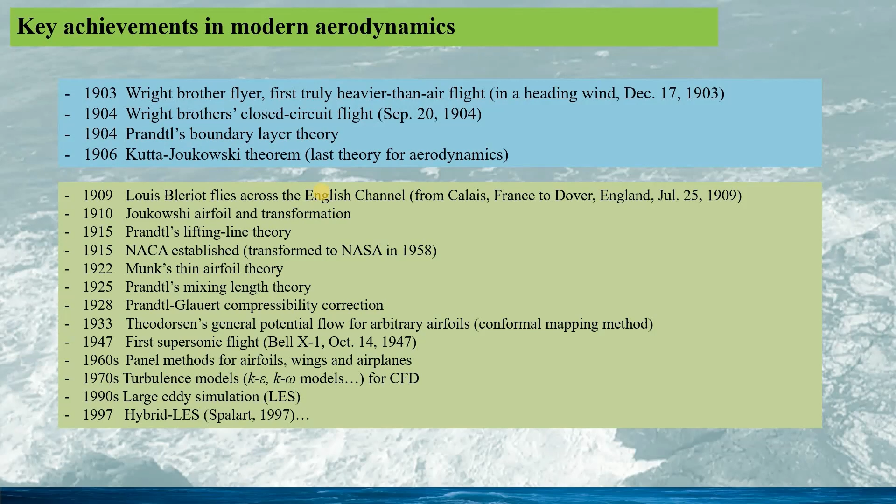In the 1990s, large eddy simulation was used for studying turbulent flow. And in 1997, hybrid LES was proposed by Spalart.

The Joukowski transformation is given by this. Here, A is the radius of the reference circle. See here the red circle. So to create a Joukowski airfoil, a modified and shifted circle, zeta prime, is calculated as this. So this would be given in this blue circle.

Here r_off is the distance between the center of the original circle, the red one, and that of the modified blue circle. So this parameter is used to control the Joukowski airfoil thickness. And delta is the shifting angle here. See the figure. This parameter is used for controlling the camber line.

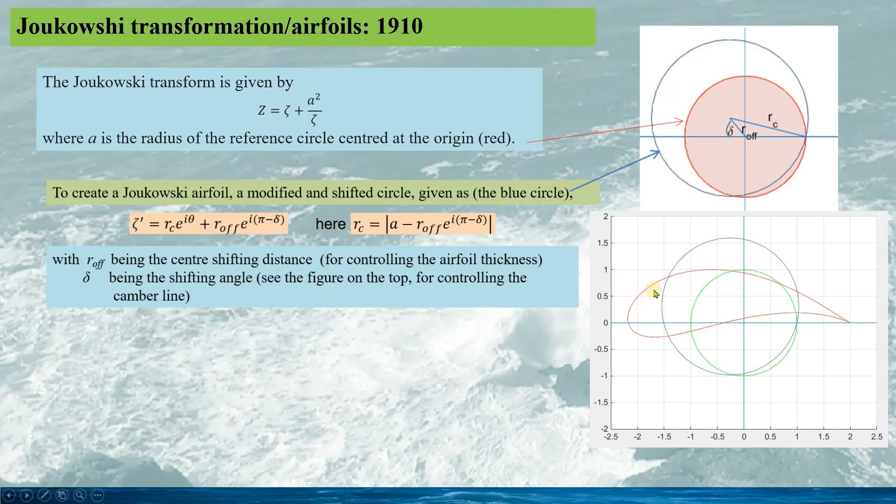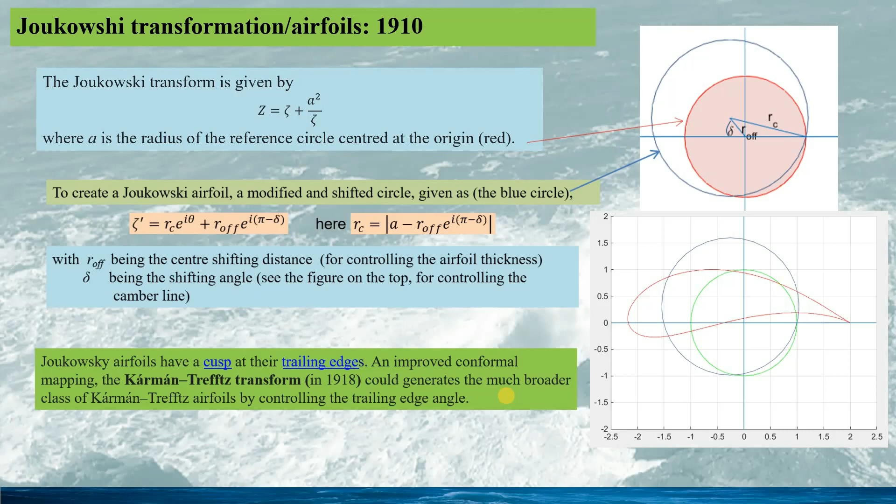This plot shows the original circle in green, the modified circle in blue, and the Joukowski airfoil in red. From this Joukowski airfoil, we can see this airfoil has a cusp at the trailing edge. This might be a limit for the Joukowski airfoil. For solving the problem, Kármán-Trefftz made the transform in 1918, which could generate much broader airfoils for practical application.

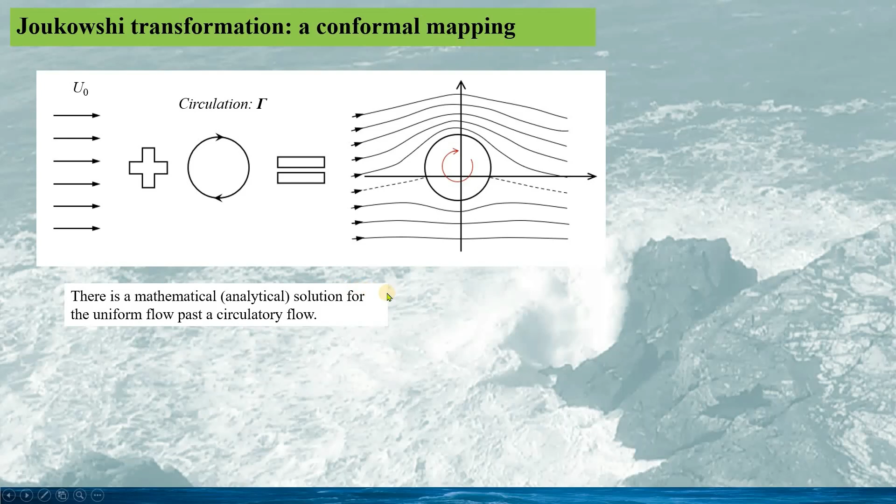So for such a type of flow, we have the analytic solution. So if we apply the Joukowski transform, also called conformal mapping, using this formula, we can have the flow past an airfoil, the Joukowski airfoil. And we can see from this plot the stagnation point at the leading edge and the stagnation point at the trailing edge. And the flow separates from the trailing edge. This is in accordance with the Kutta condition.

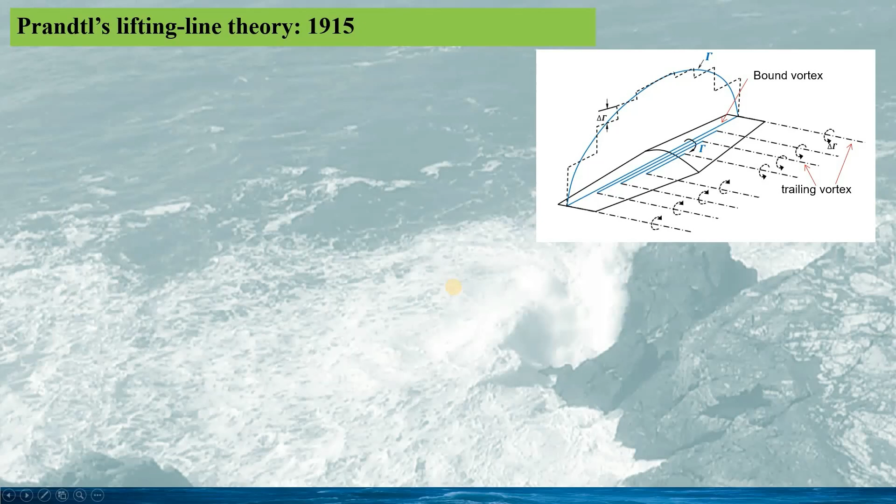The Prandtl lifting line theory, or the Lanchester-Prandtl wing theory, is a mathematical model for predicting the lift distribution of a 3D wing based on its geometry. See here. So the lifting line theory states that the lift over each wing segment, the local lift per unit span, does not correspond simply to the 2D analysis product, but is also strongly affected by the neighboring wing sections.

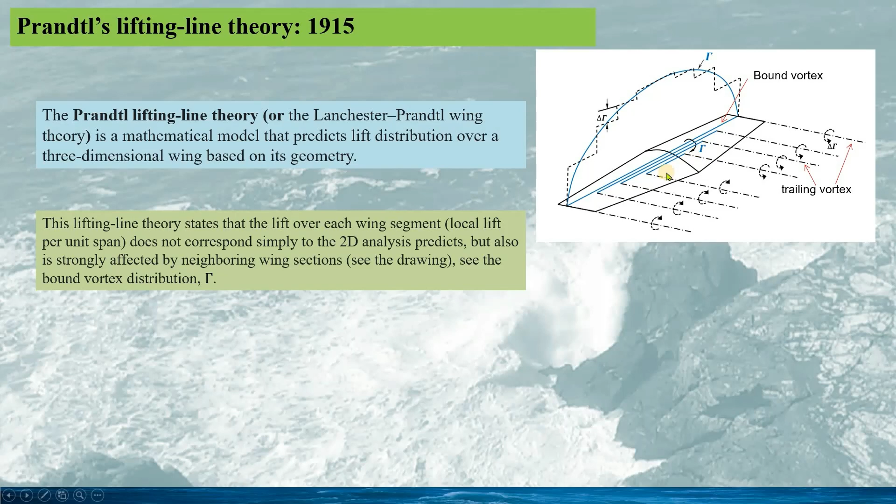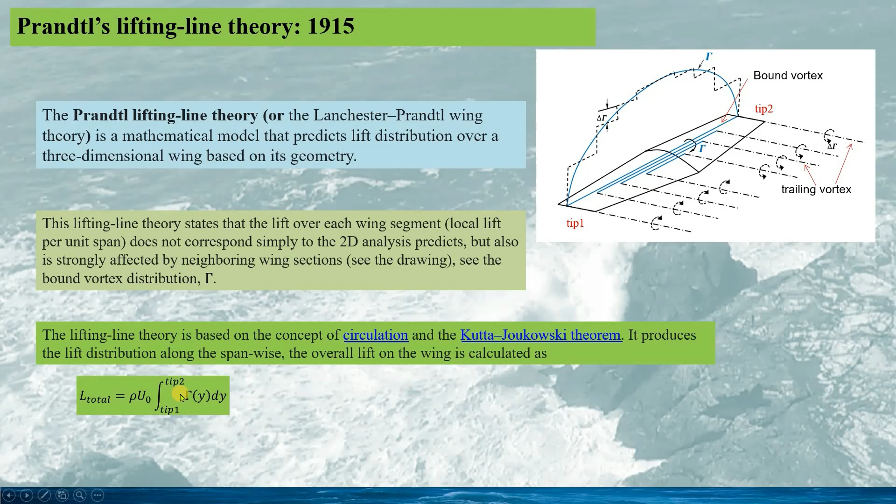So we see this bound vortex and its distribution along the span of the wing. The lifting line theory is based on the concept of circulation and the Kutta-Joukowski theorem. It produces the lift distribution spanwise based on the distribution of the bound vortex. So the overall lift on the wing is given by this integration from tip 1 to tip 2.

Thin airfoil theory is a simple theory of airfoils in incompressible inviscid flows. It was developed by Max Munk in 1922 and further refined by Prandtl, Glauert and others. The theory idealizes the flow along an airfoil as a two-dimensional flow along the thin airfoil.

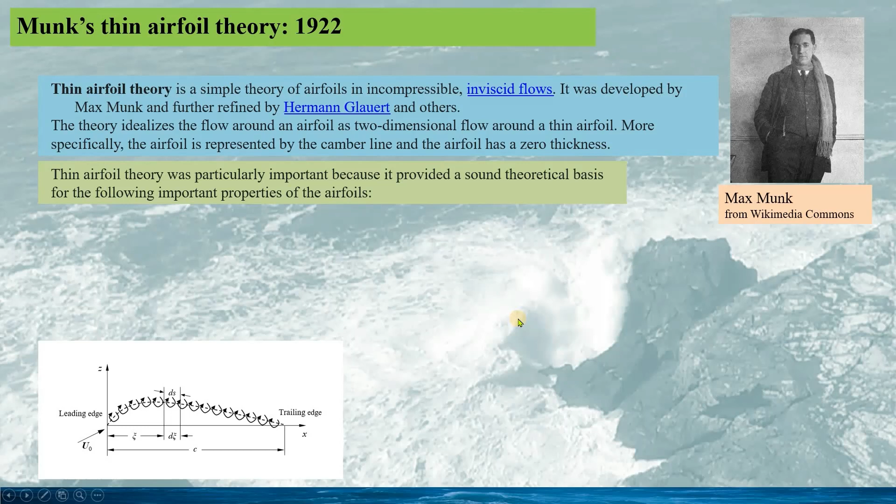The thin airfoil theory was very important because it provides the sound theoretical basis for the following properties of the airfoil. The center of pressure and the aerodynamic center are coincident and lie at the quarter chord behind the leading edge. The theoretical lift coefficient for a thin airfoil is given as this simple equation. Here, alpha is the angle of attack in radians, and CL0 would be 0 for the symmetric airfoil.

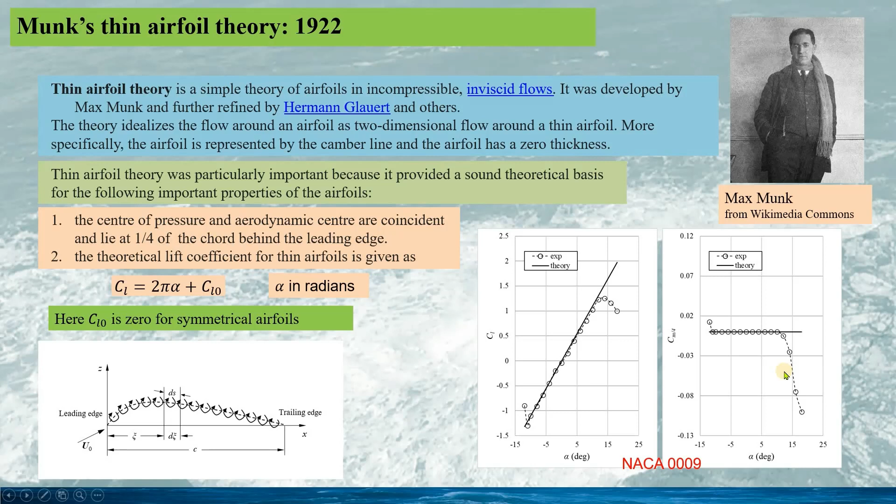Take an example of the thin airfoil NACA 0009. The prediction using the thin airfoil theory is in black line, and the dot and dashed line is from the experiment data. This is for the lift coefficient, and this is for the moment coefficient. So we can see when the angle of attack is small, say less than 12 degrees, the thin airfoil theory predicts the lift and the moment very well. See the comparison here.

In 1925, Prandtl studied the molecular shear stress in fluid. See the figure here. So he could determine the shear stress τxy in terms of the mean flow velocity Uy and the fluid turbulence viscosity νt, given in a form as this. And based on Prandtl's proposal, the mixing length theory, the fluid turbulence viscosity is given as this. And here, l_mix is the mixing length. It needs to be specified in the actual simulation.

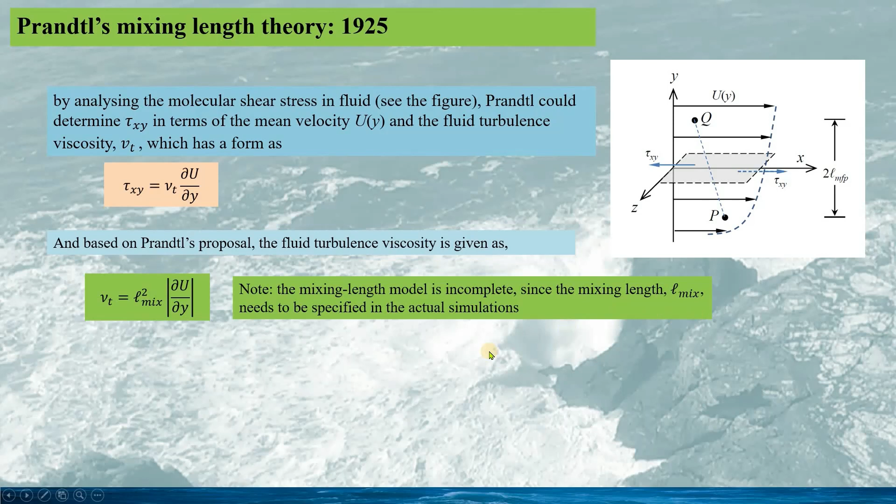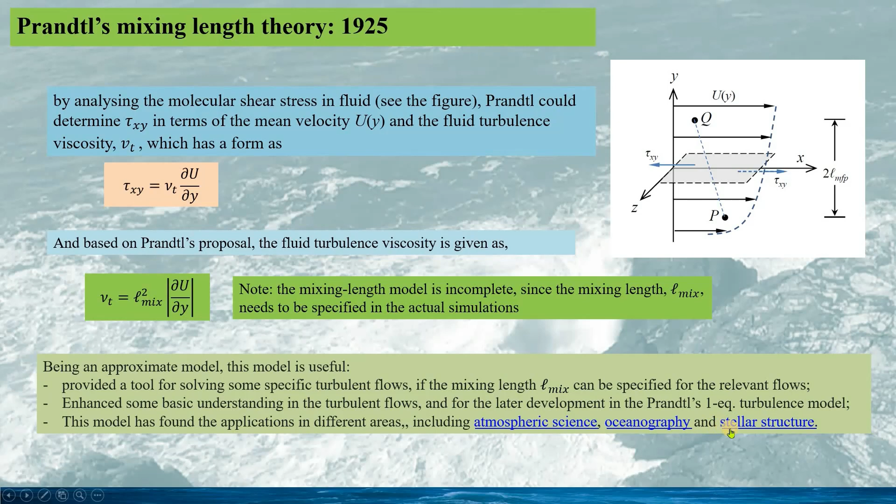So this, in a way, would limit the application of Prandtl's mixing length theory. This approximation model is still quite useful for providing a tool for solving some specific turbulent flows, if the mixing length l_mix can be specified. This model can be used for enhancing the basic understanding of turbulent flow and provided the basis for the later development of Prandtl's one-equation turbulence model. This model has found applications in different areas, including atmospheric science, oceanography, and stellar structure.

In the 1920s, researchers worked on high-speed flows. In 1925, linearized supersonic aerodynamics was developed, and in 1928, Prandtl-Glauert made the correction for compressibility, and in 1940, the application of supersonic flow theory was made, and in 1947, the faster than speed of sound flight, Bell X-1, was made.

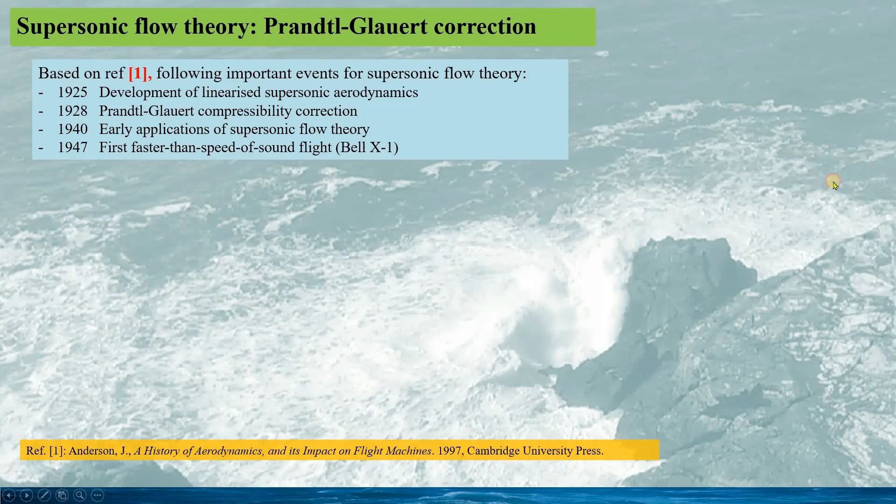In the development, an important advancement was the Prandtl-Glauert transform, or Prandtl-Glauert correction, established based on the linearized equation with compressible inviscid flow, and the correction was made for the pressure coefficient Cp given by this. Here Cp is the pressure coefficient with compressibility, Cp0 is the pressure coefficient for incompressible flow, and M0 is the free stream Mach number.

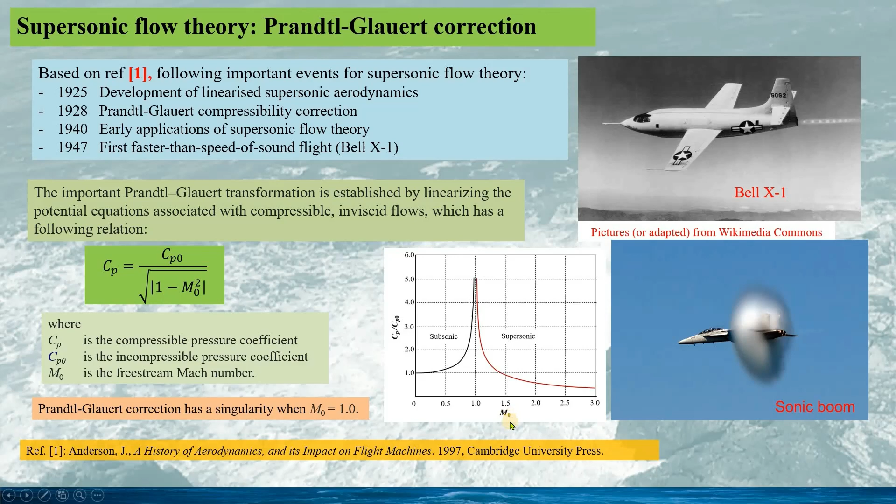Obviously, we can see the Prandtl-Glauert correction has a singularity when M0 equals 1.0. See this figure. When M0 equals 1, Cp would be infinite. If we look at this picture, we can see the sonic boom around the aeroplane when the aeroplane passes the sound barrier, that is, the Mach number is 1.0. So the sonic boom might be linked with the singularity of the pressure coefficient at Mach number M0 of 1.0.

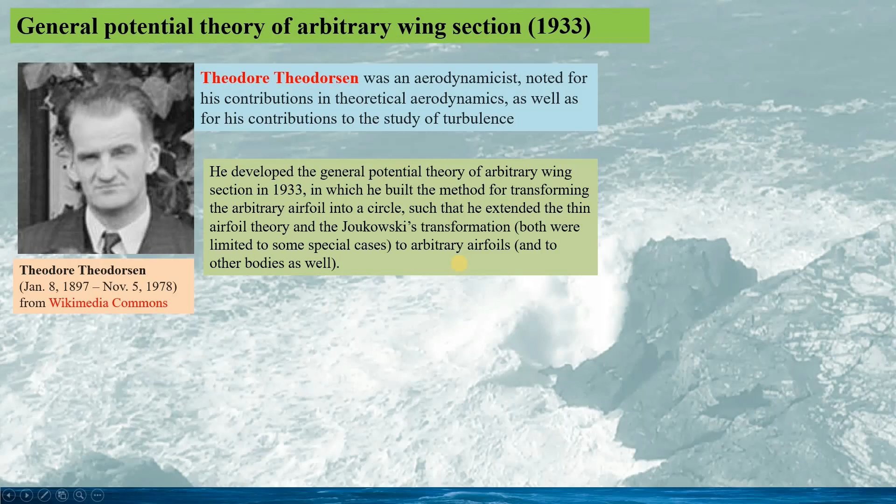Theodorsen was a Norwegian-American aerodynamicist who was famous for his contribution to theoretical aerodynamics, as well as his studies of turbulence. In 1933, he developed the general potential theory for arbitrary wing sections, in which he built the method for transforming an arbitrary airfoil into a circle, such that he could extend the thin airfoil theory and the Joukowski transform. Both were limited to specific cases, but the general potential theory can be used for any airfoil and even other bodies as well.

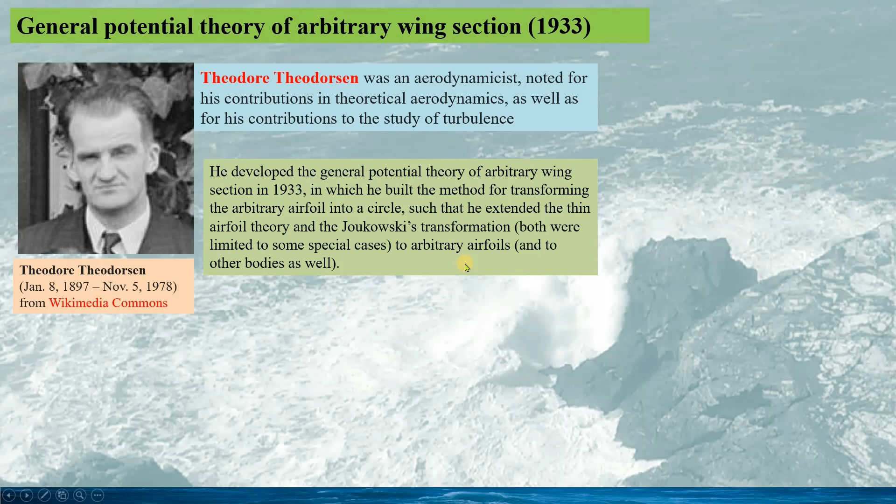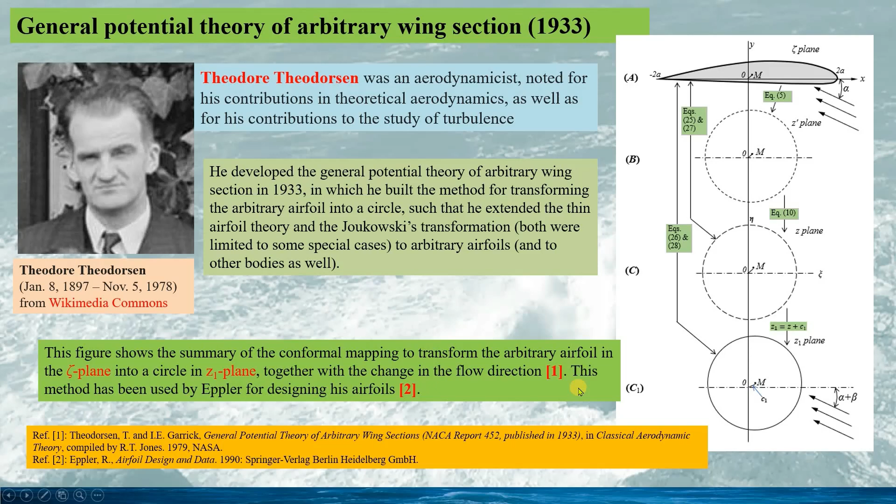With the digital computer available for computation, the panel code was developed from the early 1960s. The advanced panel codes such as PANAIR, developed by Boeing, were first introduced in the late 1970s, and such panel methods have been very popular even with the great advancement in CFD. Panel codes are still used for preliminary aerodynamic analysis because of their fast turnaround time and the reliable prediction for

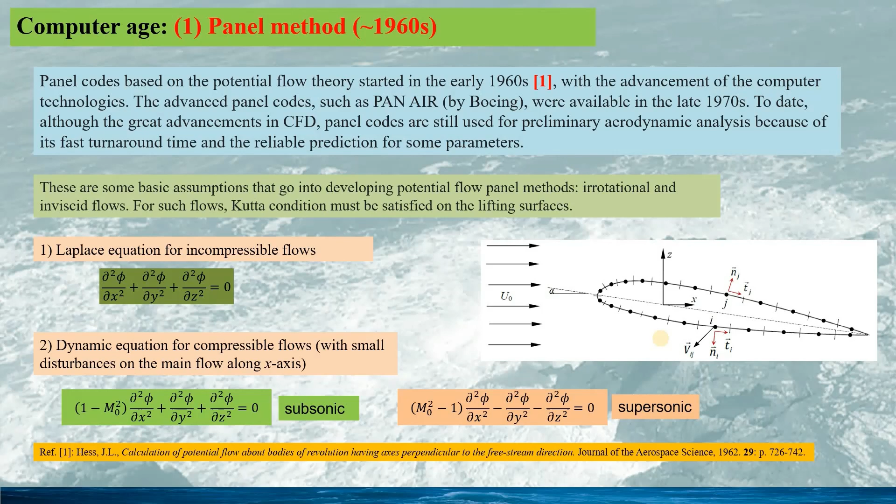the dynamic equation for the potential function phi for the subsonic flow is given as this, and for the supersonic flow, the dynamic equation for the potential flow is given as this. The compressible flow has a different dynamic equation for the potential function. Using some specific coordinate transform, we can still write the dynamic equation for the potential flow in subsonic and in supersonic to be in the form of the conventional Laplace equation. Hence, all these flows can be solved using the panel method. Details can be found in the relevant textbooks or in my talks later.

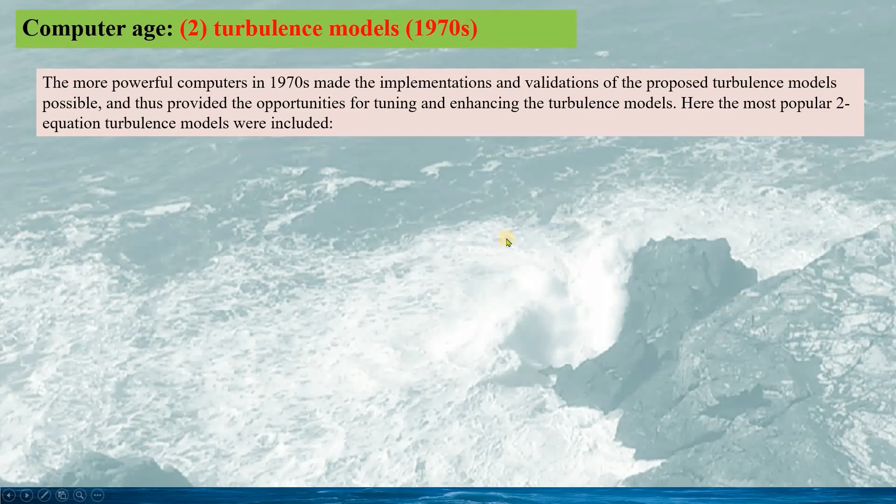Powerful computers in the 1970s made the implementations and validations of the proposed turbulence models possible, and thus provided the opportunities for tuning and enhancing the turbulence models. Therefore, in the 1970s, the turbulence models were well established and well accepted. This includes the famous two-equation turbulence models. K-epsilon model: the first K-epsilon model was formulated at Imperial College in the late 1960s and tuned and enhanced in the 1970s.

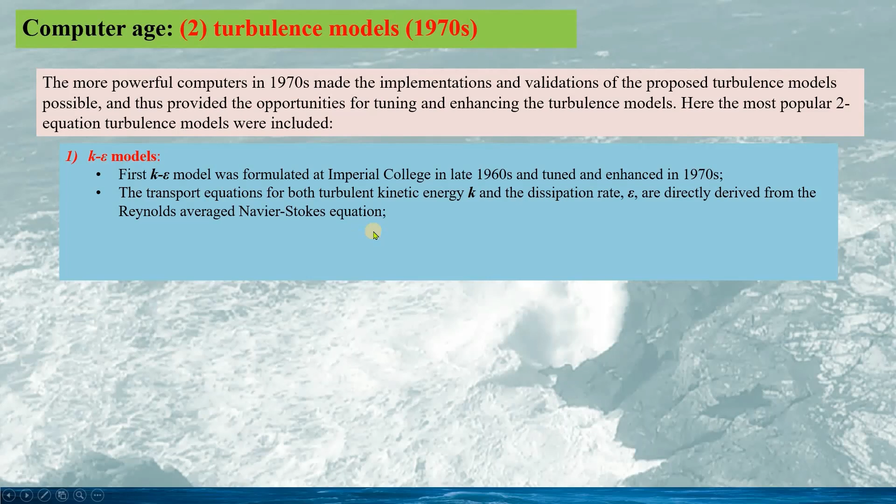The transport equations for both turbulent kinetic energy K and the dissipation rate epsilon are both directly derived from the Reynolds-averaged Navier-Stokes equations. And the K-epsilon model has gained widespread use since the 1970s. Enhanced models were available, including the renormalization group RNG and the realizable model, and many other variants. The first K-omega model was proposed by Kolmogorov in 1942 and independently by Saffman in 1970. Wilcox kept improving Saffman's K-omega model since the 1970s.

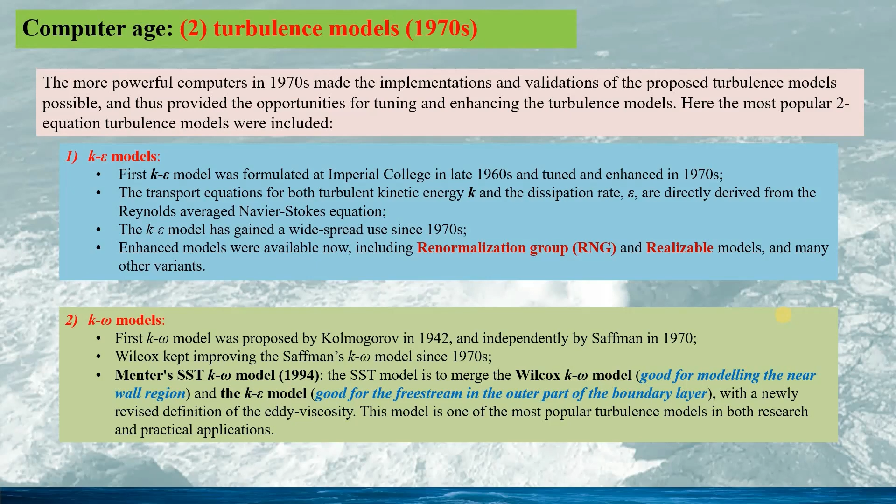The K-omega model got popular since Menter's SST K-omega model in 1994. This SST model merges the Wilcox K-omega model, which is good for modeling the near-wall region, and the K-epsilon model, which is good for the free stream in the outer part of the boundary layer. And in the SST model, the formulation for the eddy viscosity has been revised. From examples in research and in industry applications, this SST model is one of the most popular models.

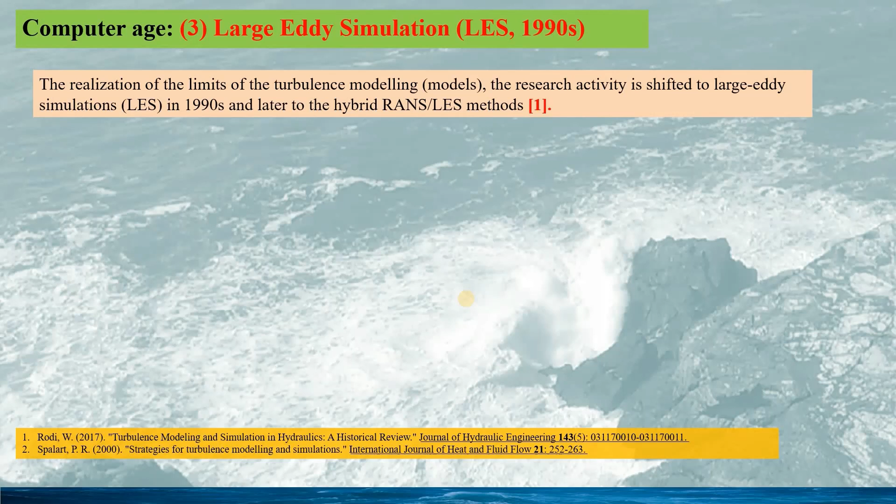Soon after the various turbulence models, the research activities in this field realized the limits of the turbulence models. Hence, a lot of research shifted to large eddy simulation (LES) in the early 1990s, and later to hybrid RANS-LES modeling, according to reference 1. It is well known in LES, large energy-carrying eddies are resolved numerically, and only the small eddies need to be modeled. Generally speaking, these small eddies are more isotropic, thus easier to model, at least in principle.

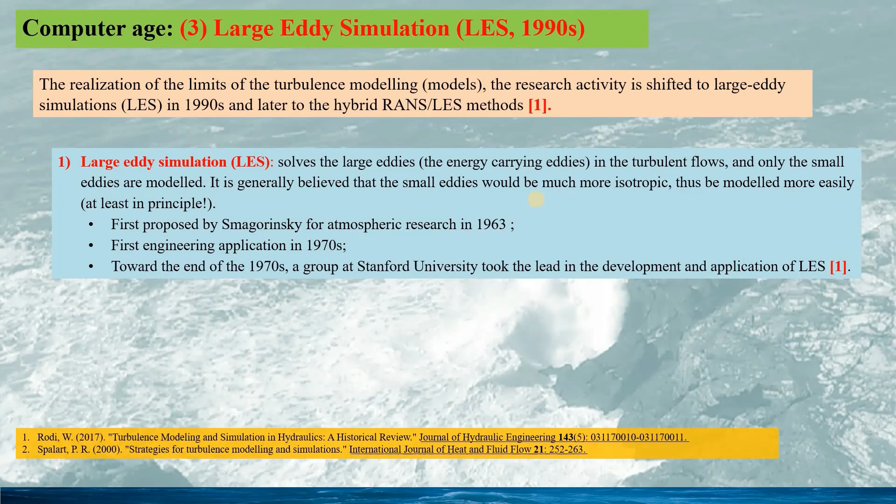LES was first proposed by Smagorinsky for atmospheric research in 1963, with its first engineering application in the 1970s. In the late 1970s, a research group at Stanford University took the lead in the development and application of LES. However, LES places a severe demand on computation, in many cases well beyond general practical applications. For instance, the computation of LES would be proportional to the Reynolds number to the power of 1.8 to 2.

So, for practical applications at high Reynolds number, for instance a car or an airplane, the LES mesh would be 10 to the power of 11.5 and the time steps would be 10 to the power of 6.7. Currently, a large CFD computation would be roughly 10 to the power of 9. Thus, pure LES modeling is still very limited to simple flows at low Reynolds number, and primarily used as a research tool for studying the details of turbulent flow.

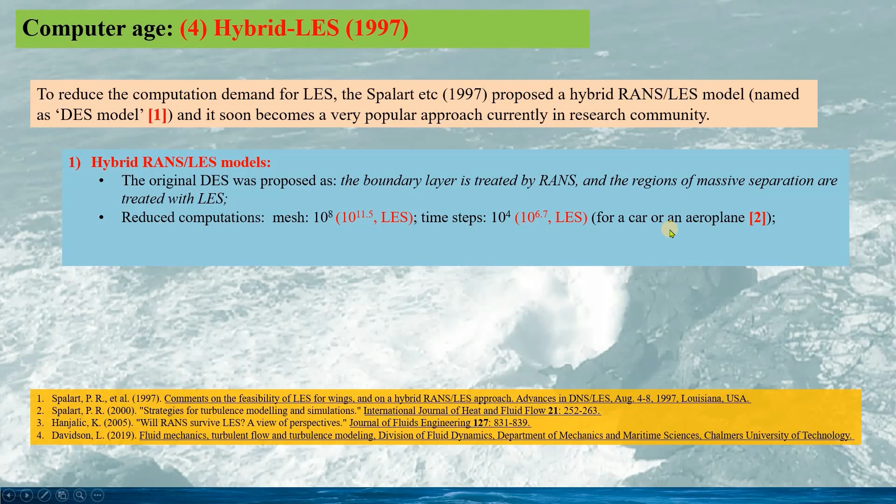To ease the great demand in LES, Spalart proposed a hybrid RANS-LES model. He named the hybrid model detached eddy simulation, the DES model. This hybrid method became a very popular approach, especially in the research community. In the original DES, the boundary layer is treated by RANS, and the regions of massive separation are treated with LES. Therefore, the reduction in computation can be significant. The mesh now is 10 to the power of 8 compared to 10 to the power of 11.5 in LES. The time steps are 10 to the power of 4 compared to 10 to the power of 6.7.

Now many different hybrid RANS-LES models have been proposed and are being tested. One important issue is how we can better implement the hybrid RANS-LES model and solve some challenging issues in it. Using a hybrid RANS-LES model sometimes can be very tricky. Generally, LES can have very similar mathematical equations to those in RANS. Thus, the numerical implementation would be the same as the RANS model according to reference 3, and even easier according to reference 4.

In some cases, people would like to perform a conventional LES on a coarse grid for wall-bounded flows, especially in the attached flow region. This approach would be very erroneous, since this type of LES would be inferior to even simple conventional RANS modeling. So when we use LES, we need to pay a lot of attention to the grid.